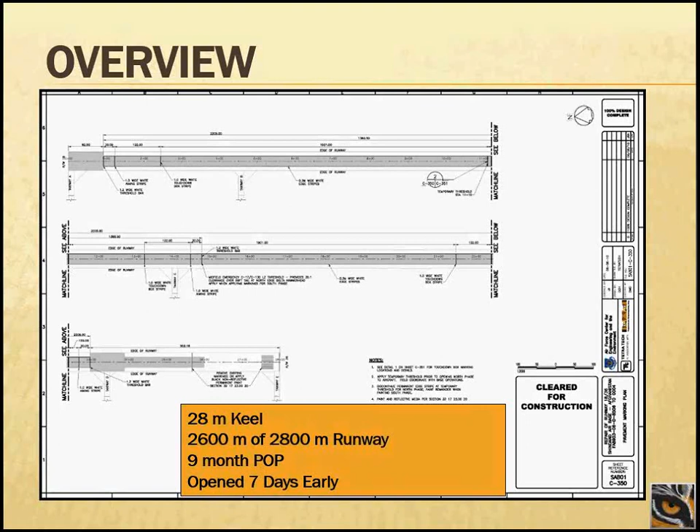Now, not everybody knows where Shindand is, so which is the pointer? The red line. Yeah, that was the switch. You have to do the switch. Let's just use the button. See, I can do asphalt and soils and concrete. All right. Yeah, okay, that was just turn on. There's a button there. Okay, now you got me, okay. You take me back one or two. There you go, did you find the button? No, it's not there. Right here. Oh, right there. Okay, nice, it doesn't show up on the screen.

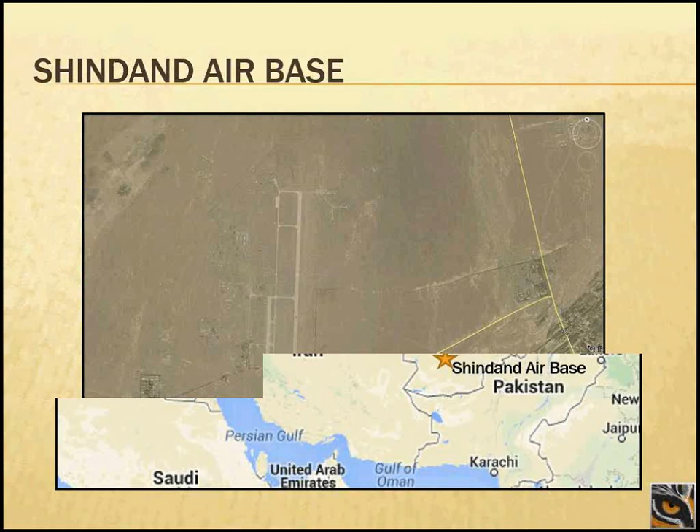This is the air base as it was when I went in there in 2010. A single runway, parallel taxiway, connectors, and the base camp for the Soviets when they were there is over on this side. The village of Shindand is down here. It was sort of a vacation spot for the Taliban, so we were always on alert.

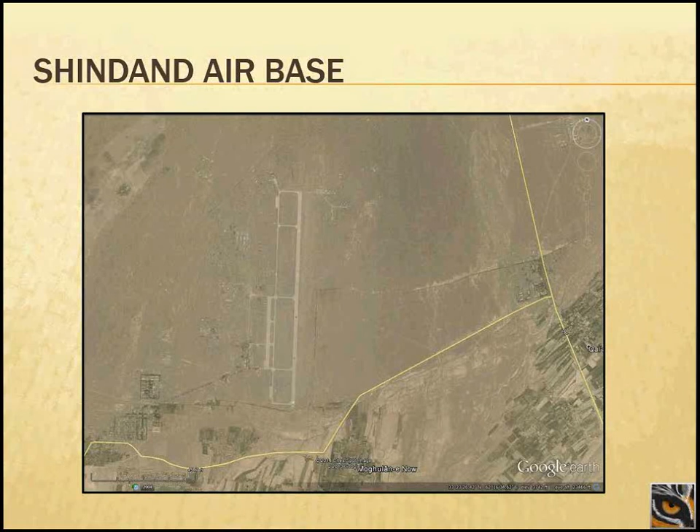When I got there, you don't just buy a United Airlines ticket and go to Shindand. My travels took me eventually to Kabul, where I was picked up, and I stayed in the safe house for about 30 hours until they could arrange other transportation for me. When you're in a safe house, you get to know the people very well because everybody watches everybody's back. A few weeks ago, you may have read in the paper where a common restaurant that Westerners go to is attacked. Yes, that happens.

My marketing person putting this together, he said, but you don't have any pictures of outside. I said, that's right, if I gave the location, there wouldn't be a safe house anymore. So you learn to stay with people. We had special forces in there that were our security in-house, as well as protection outside.

From Kabul, from the safe house, we went to Bagram. I got a C-130 Milair flight to Herat. Spent time in Herat and went down to Shindand.

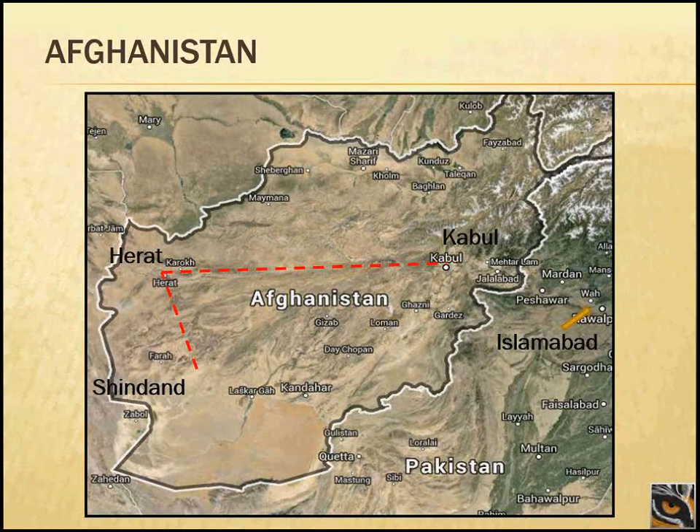Now in Herat, when we landed, we said, where's our next C-130 flight to Shindand? And they said, up there. So we asked, where do we get to stay? And they said, you get the last few bunks in the Spanish Army camp tent. Great. So we spent the night there.

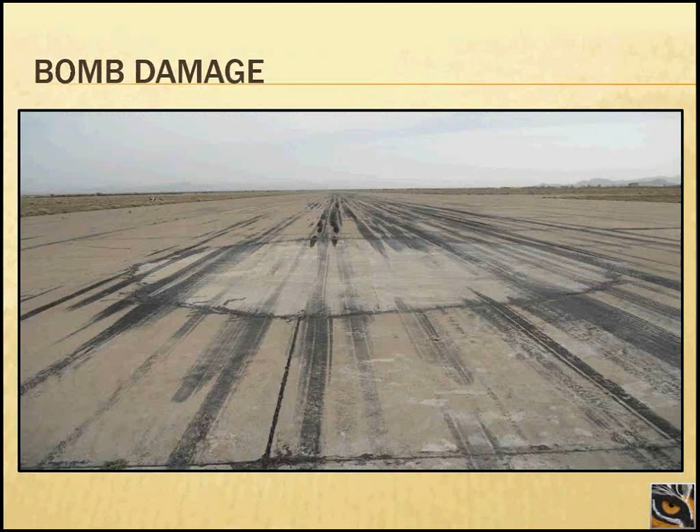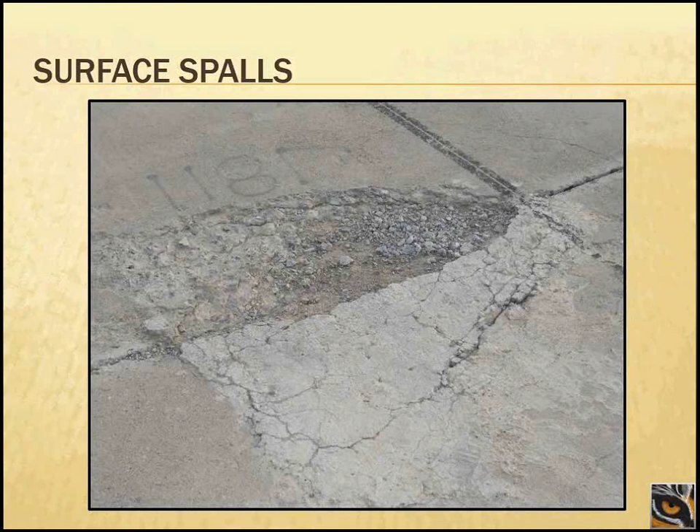The way the Soviets built it, they set up wood forms, left the wood in place, and just built it into the concrete. Those little chips you can see are from the wood forms. It seems so minor because we don't really have a class on FOD.

But FOD will close the runway down. The story I use is that a squad of F-16s left Langley Air Force Base, took off two by two, and in the second batch of two, one of them ingested a thumbnail-sized chip of concrete. By the time they got to Panama City, the affected engine had vibrated enough that the aircraft self-destructed in air, crashed into a civilian neighborhood, and lost the pilot and the plane. That's what that damage was.

So FOD is very, very serious. When I was at another installation right after 9/11 and the alert siren went off, the F-15s on alert came out. The lead one FODed it out because we were there trying to get the taxiway under control to fix it. They FODed it out, that alert mission got canceled, and they had to call it up from another base. So FOD is a very important issue.

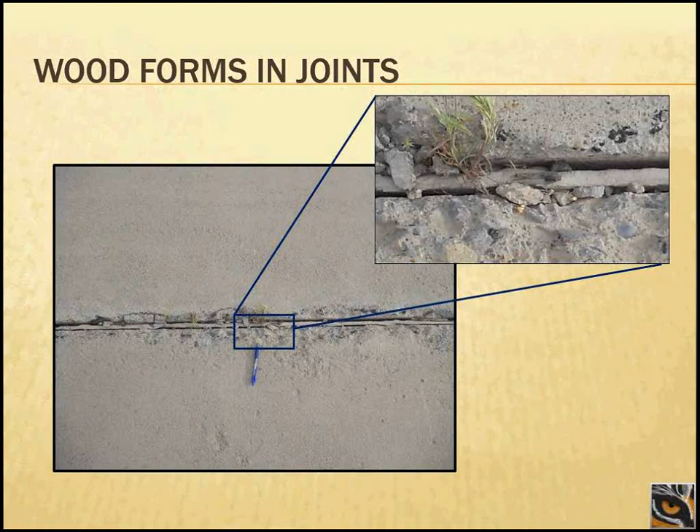That's where the materials come into play. That's what we get here - materials, understanding of materials. And of course, vegetation in the joints.

Okay, you're the pavement expert, you have pavement classes - the very first question you're going to receive is, where do you want your test pits? You have to make that decision.

Well, you took Professor Thompson's class, you know - if you go to the county soils report, you look at your soil series and you divvy them up based on soil series. Well, USDA hadn't gotten to Afghanistan, nor did we have a USGS topo map either. And if I would have done it based upon military guidance, that would have been 46 test pits down the center of a runway, and they said, yeah, well, you're not going to have that - so what's your next choice?

Well, you learn to look around you. We were in a valley - a historic valley where water used to flow through, so it was alluvial deposits of historic sands and gravel. It's variable, but I shouldn't expect near-surface bedrock or anything. So I just wanted to see how much variability I really had, and whether it was going to be a bother to me.

The other thing is I always like to put my test pits where the aircraft and the main gear are. Ones out on the shoulder don't really help a whole lot. So I located them, and I just had to give it a random spacing, alternating on the center line.

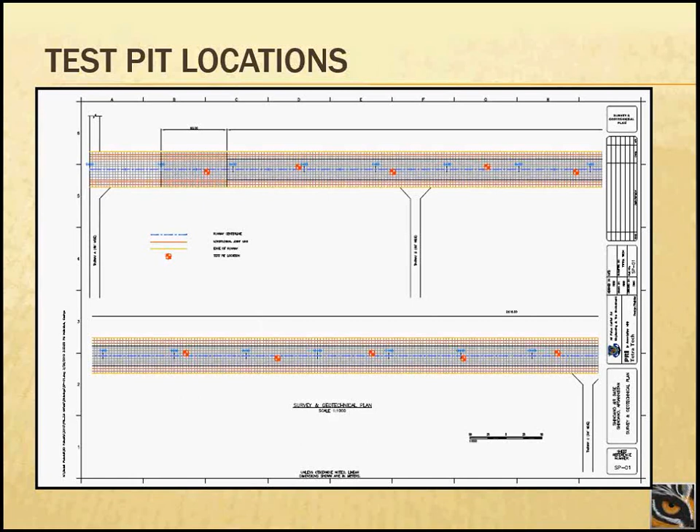Within 1 hour of arriving at Shindand, they gave me 1 hour to stow my gear. They shut the runway down, and they said the crew was waiting for it.

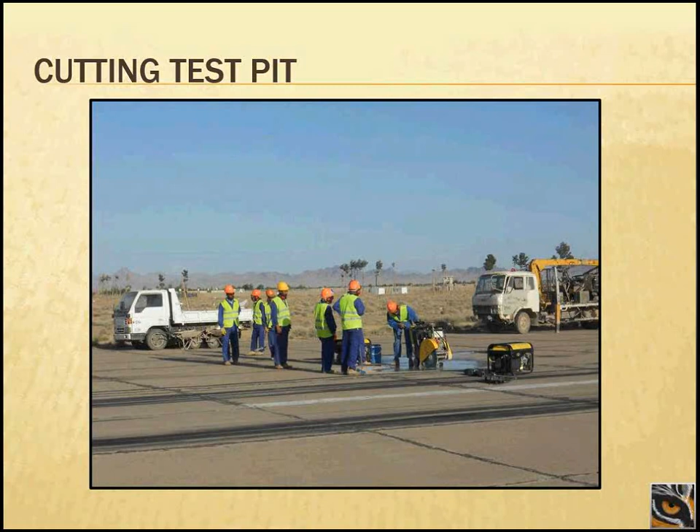We dug it out. Subgrade for the most part was 4% wet of optimum. The other lesson: pavements always are wetter underneath. Even in a desert condition with 9 inches of rain a year, it will always get wet over time. This stuff, when it came out, it was just molded up like clay.

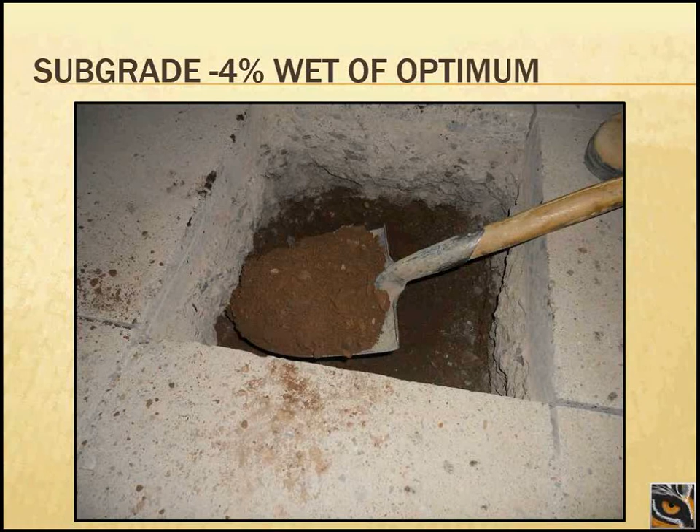So that was one factor to deal with. We were also operating, and they only closed the section of the runway we were working on, so we had the 130s coming in above us, bringing in supplies.

The white truck on the side was the one they gave me to drive. The reason I know and remember that was mine is because it's on the center line. When you take control of the runway, you park your vehicle on the center line, because I want those pilots to know that there's somebody out there. It's very important.

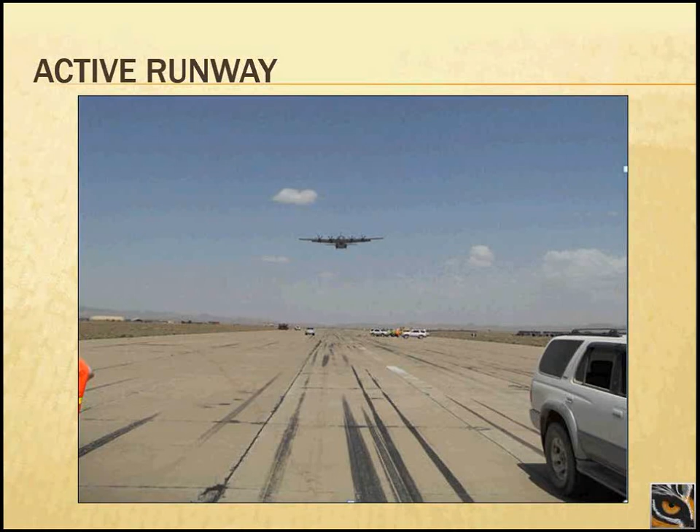Testing. We did do about 18 test pits on the runway, just 1 foot by 1 footers, because we had to then close them back up when we were done, open up the airfield for operations again, every night, for every day. They did have the lab from Herat, which had a field CBR device.

Yes, we had to fix it. Yes, we had to test it all through the camp to make sure it worked. But we got it up and got it running, so that cut down on my lab time.

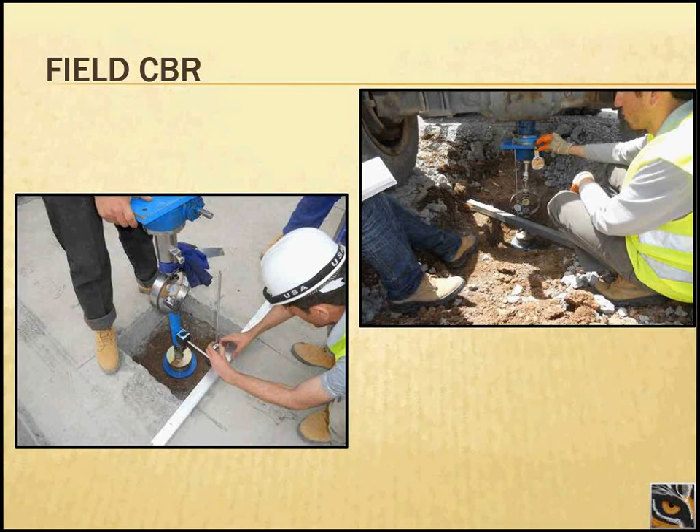We also used the infamous DCP. That's right, I asked for it, and they said, yeah, we don't know what to do with it. I do. It only takes 1,000 blows to drive DCP through the 11 inches of asphalt on Windsor Road, even if you do it 4 times. But it works. Quick and good, solid information.

In an expeditionary situation, you can use the DCP as design data. I did want to see if I had any concerns down deep.

So I dug 1.5 meter test pits off the edge of the runway with the excavator. And we could only go down about that depth because we get refusal. The gravel just got larger and larger. What did I prove? I proved that I had clay, sands, and gravels above that layer.

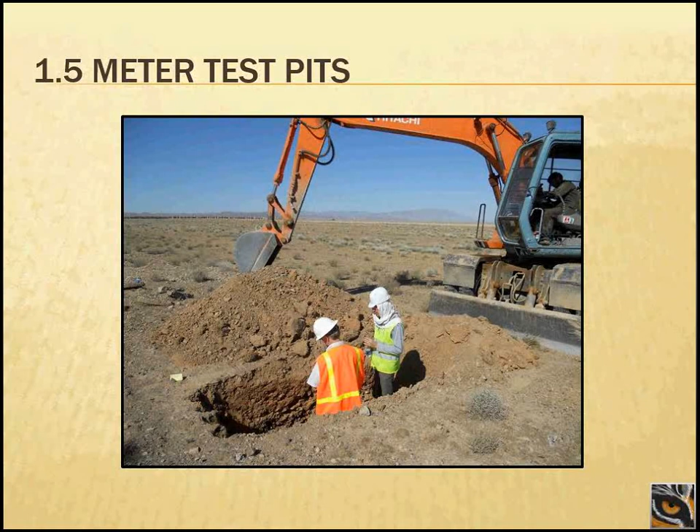And at depth, I hit hard, large gravel that wouldn't excavate. Didn't have any pockets of peat or muck. Didn't have any bedrock to deal with. So I characterized what I was working with. Quick and easy. And a test pit always allows you to see what's there.

Once we did get into the demolition phase, I went ahead and I dug a few out on the runway to make sure there were no more changes.

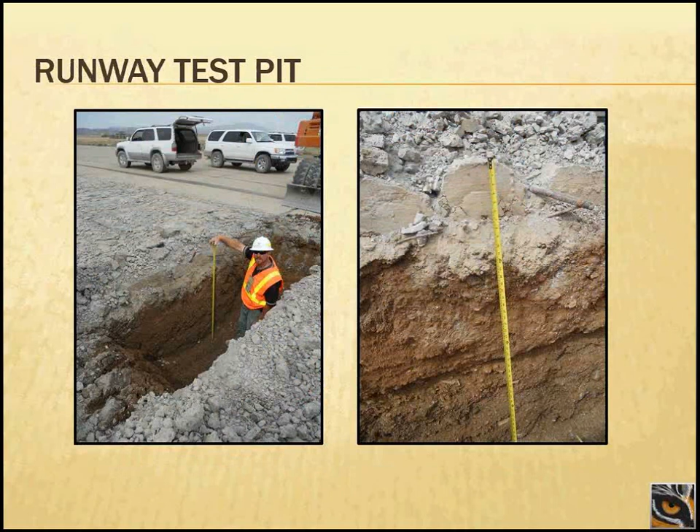And again, you try to explain to them, you do like we do here. You make it in a 6-inch mold, you do in the Proctor curve, and you punch it with the CBR piston. That concept is so hard to get across to routine labs. And it gives you quick information, and it works.

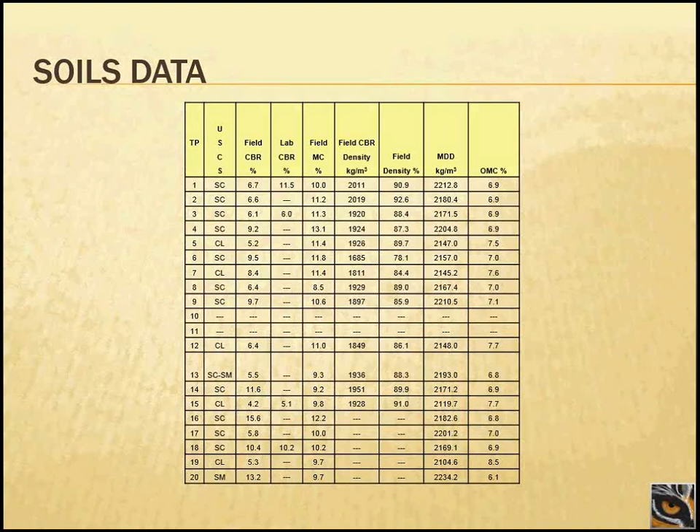Military airfields, different than the FAA. I don't know if anybody here has done a military airfield design.

We do light load, medium load, modified heavy, and heavy loads. Each load has a different mixture of traffic. For a medium load, which is what a supply or logistics base would have, it's B-52s, C-17s, and F-15s, with the C-17 being the primary cargo supply aircraft. The F-15 is for fighters that may come in for refueling or to protect the base, and the B-52 is because every once in a while you may get one.

Now, how do they come up with that many passes? Easy, that's how many passes it takes for one standard war. One standard war is you have so many targets, take so many missions with ordnance for fighters or bombers. There's a number of aircraft, you need so many people and so much support logistics - that's where the medium loads come into. It used to be that for every war fighter with a rifle, there were 8 people in the background supporting them. Technology has lowered that number to maybe about 6.

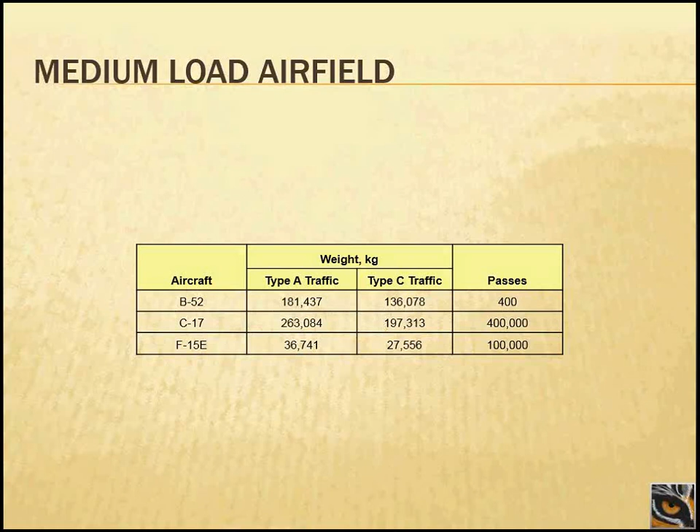So the final section I came up with at the ends, the 300-meter ends, where the aircraft are stopped and either turning around or at low speeds, we make it thicker, 380. The interior portion of the runway is 300 millimeters concrete, and I brought in a granular base on top of the subgrade.

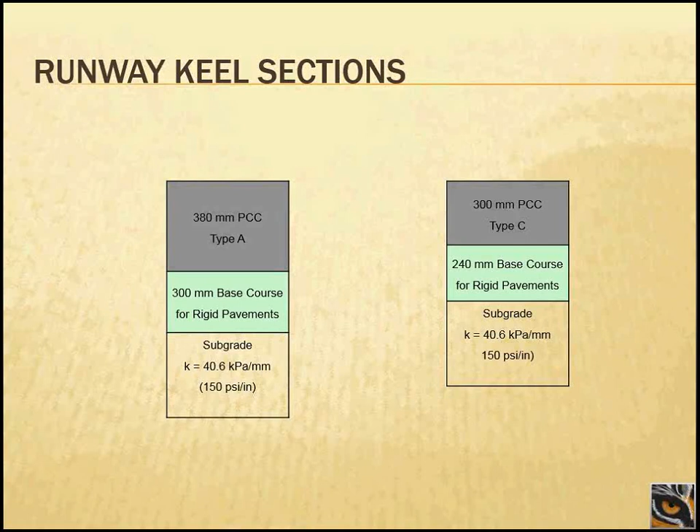So now I've been there for 12 days, I've done all that work. When you're over in a war zone, you work at least a 10-hour day, and you work every day of the week - you never stop. Because if you stop, there's nothing to do, and you'll start to get bored or go crazy. So you just keep yourself working, you drop into a work mode, everybody's working.

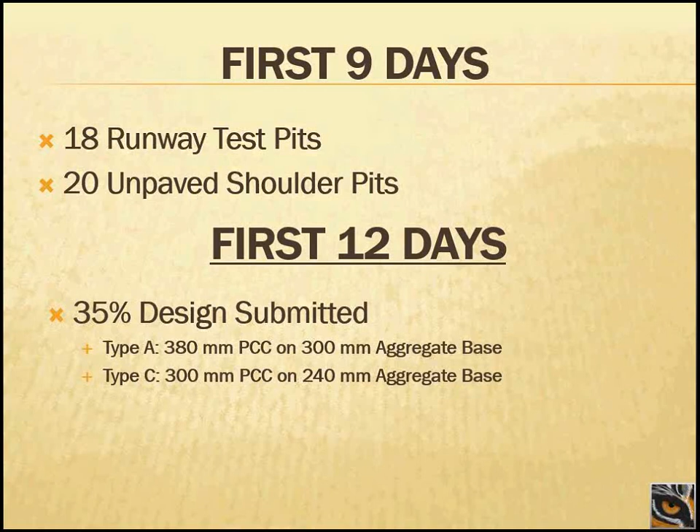So we're ready for work. I strongly expect that the gentleman on the far right was probably there in 1961 as a boy building that runway the first time. I also suspect these gentlemen were out helping with all the runway patching as well, after every event. A few weeks before we got there, there didn't used to be a perimeter fence, so they would come out onto the runway and have motorcycle races on it.

But in the village, they don't have any power. They live in adobe homes that they built. They plant the hay and wheat by hand, harvest it with sickles, and have shepherds to take care of the goats and sheep.

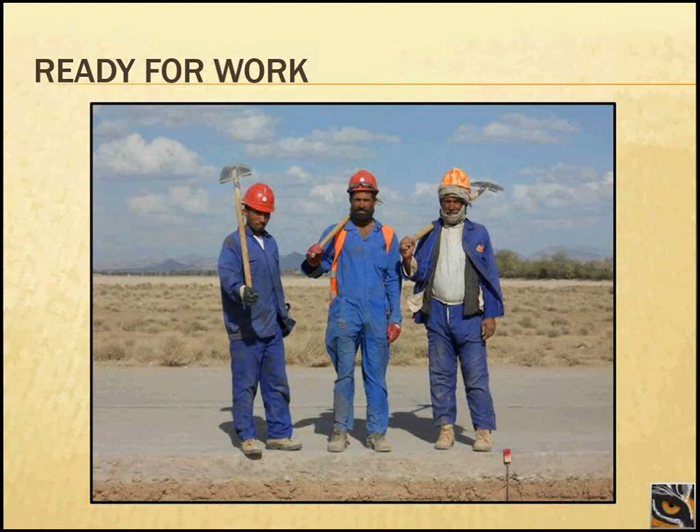So we had to get the keel section operational, which, by the way, I had told the Air Force - the outer edges of the keel were in very bad shape, which is where the outboard engines of C-17s are. Our mission was to get this runway from C-130s to C-17s so the base could expand. Those outboard engines would pick up FOD because a lot of those distresses I showed were out on the outboard side of the keel.

But there were people who didn't quite understand pavement engineering that were assigned to this base, and they argued and didn't want to do that - even though back stateside they were all saying, just listen to John, he'll take care of you, just do what John says. But other politics got into it.

To speed the demolition, this is the rubblization device. You heard Professor Thompson talk about it, I hope. Mr. Thompson and I did airfield rubblization where it was actually transformed into granular base in place, for the first runway up in Selfridge, Michigan in '02 or '03. I've written engineering briefs for the FAA on rubblization, and I've got standard specs set up for for rubblization, so I use it every place I can.

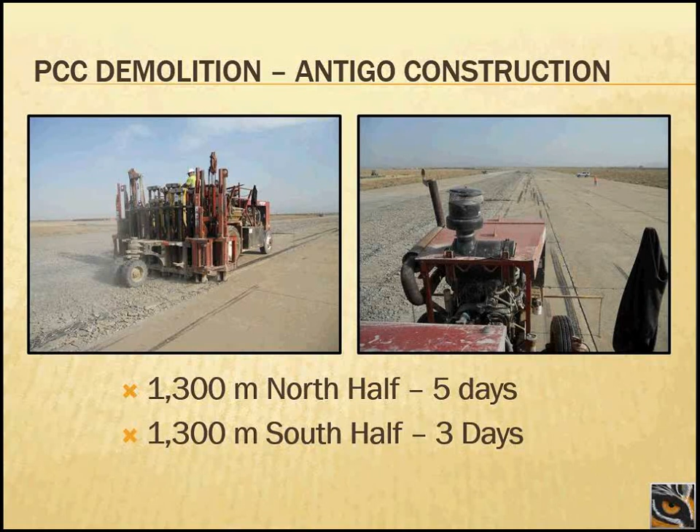There's a mouse, the external one. Yes, mouse connected, you can just keep it. So if you haven't seen one work...

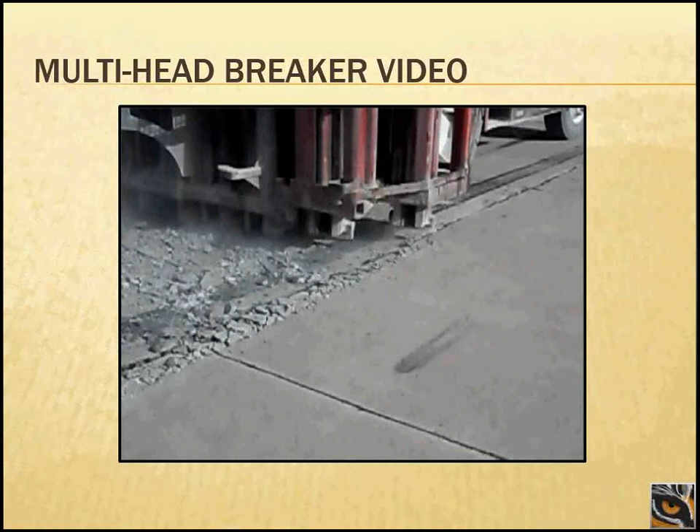doesn't happen. Now the hammer sequencing, is part of the key, and he can control

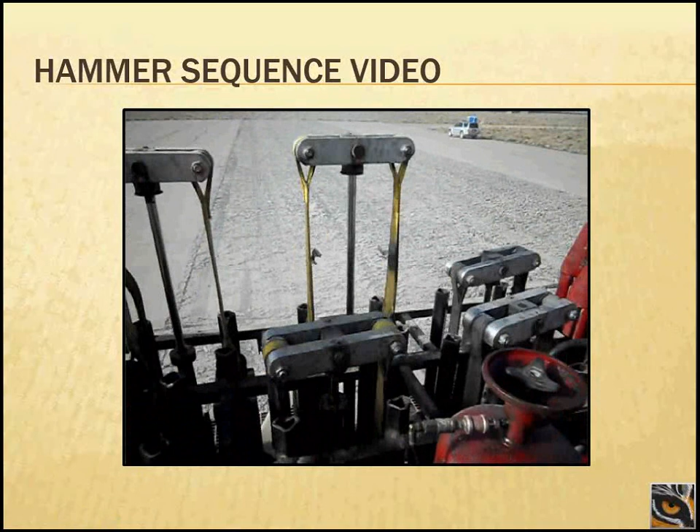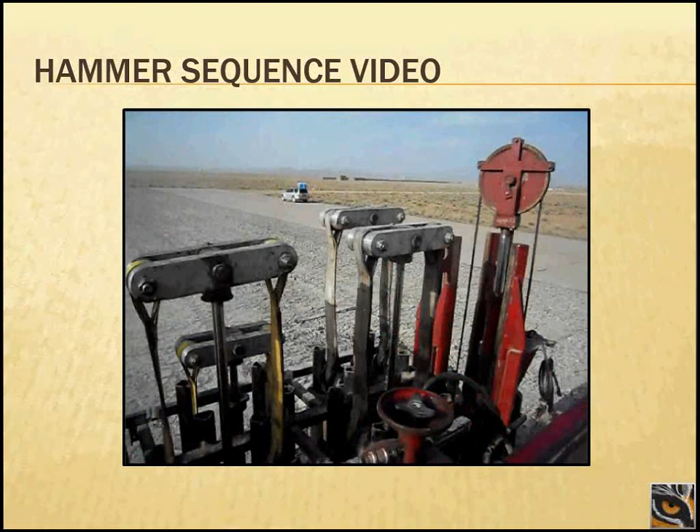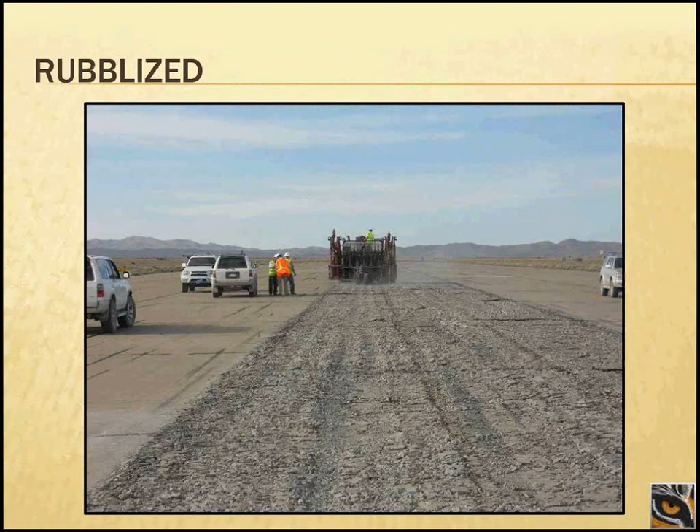You wanted to fracture it to ease the excavation. Just another picture after it's been rubblized. And that's George Shinners himself.

Monday afternoon, I got a phone call on how to remove a 24-inch thick abandoned airfield in Poland, which converts the runway into a truck road. But they had to match grades. I said, well, we can lower the concrete, or we can rubblize it and move it out, or excavate it.

I said, I don't know if Antigo is near Poland right now. They usually keep equipment in Europe. And they said, well, if Antigo is not available, I'm sure we can find somebody else. And I'm like, okay, you'll learn, you'll listen. Sent George an email. He responded yesterday and said he's working at the Krakow airport right now, rubblizing in Poland.

So it all comes together. Wherever you need to be, they can get there. And we are just excavating using a variety of equipment that they could find. Most equipment that goes into Afghanistan never leaves. It ends up eventually being fixed until they can't fix it anymore.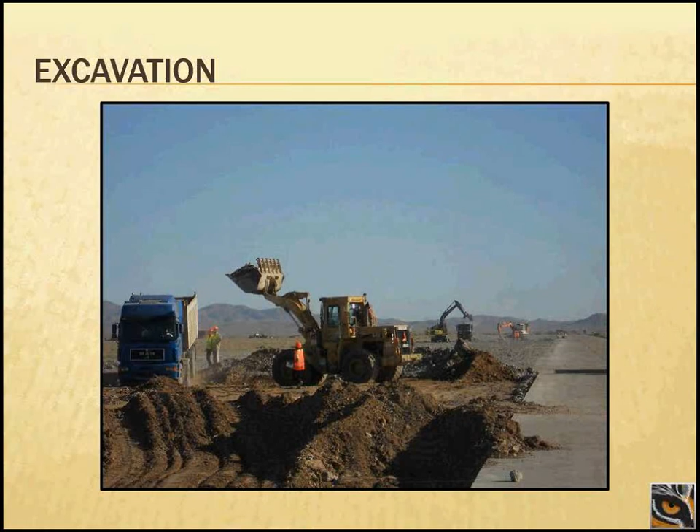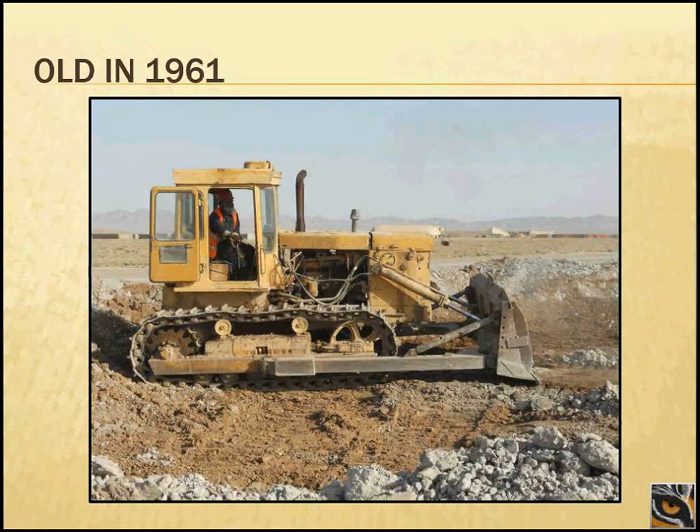I'm certain that when the Soviets were running their bombers out of there, that happened. Also, remember the photograph at the beginning with the surface falls? What do you think this might contribute to?

Tearing out an old pavement is an excellent way to learn why it was failing and what's going on, and what to look for. You really need to pay attention to it. The pavement will tell you what's happened to it. You just have to listen.

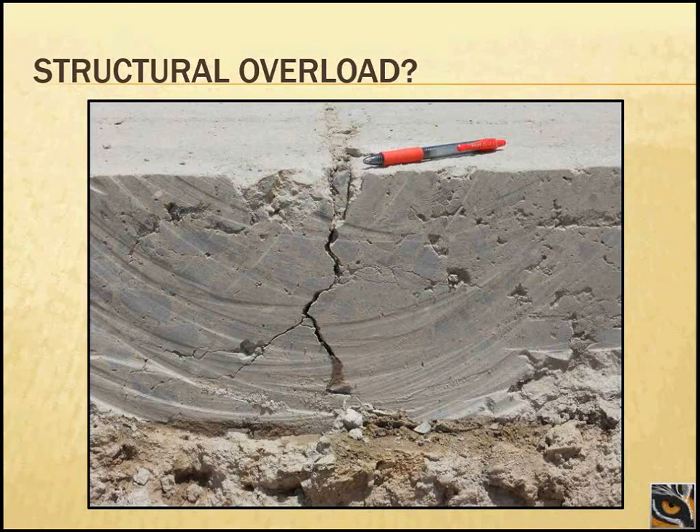So now I've been there for 28 days. Design's heavily underway. Construction is starting. Other aspects we had to deal with.

The Soviets, this was such a crucial base to them that they had well over 10,000 landmines around this base. Stories were that this was the highest concentration of landmines anyplace in the world.

We didn't have time to clear all the mines. We just located them and put a rock on it and painted it white or blue.

We didn't go on little excursions off the runway. And you also hoped that there wasn't a temperature change that it might go off by itself, because once they're so close together, once one goes off, it can just start triggering. I often felt that you could just take a handful of marbles and throw it and hit something.

Now, the Army did clear us a path through the minefield to go from the runway back to our camp, as well as a haul road, so we had that. But did not go off the edge of the runway.

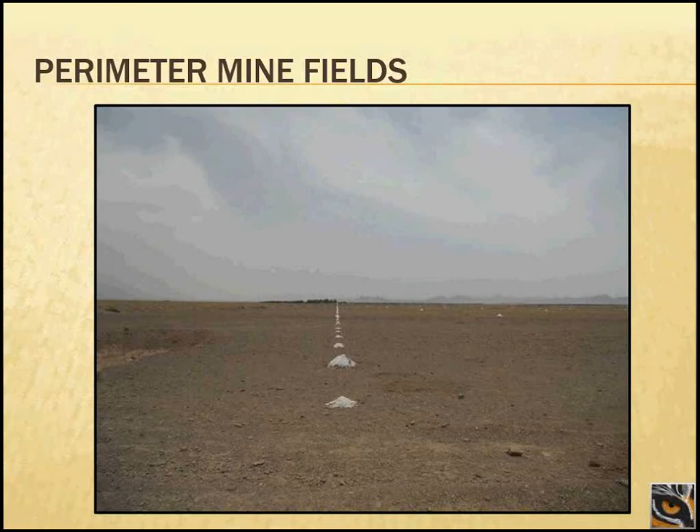Hey, it works. It works.

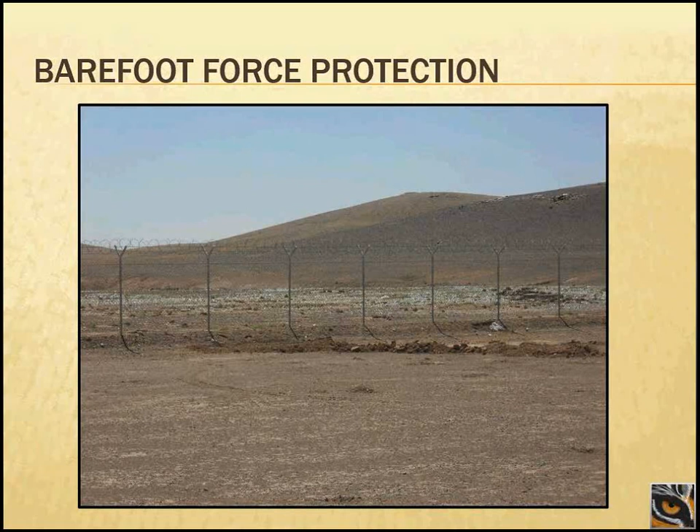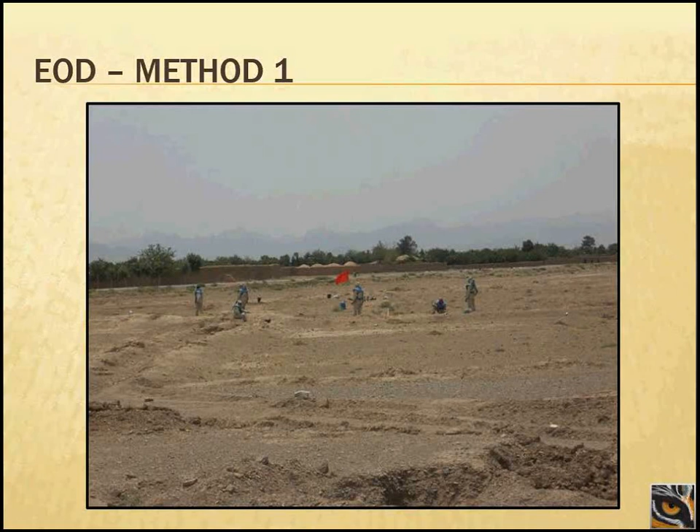This is the EOD crew in the process of clearing and locating. These were actually Afghan Army soldiers doing it under U.S. direction for training. Behind them you can see the wall around the village, and this road is the road you'd take to Herat if you went that way.

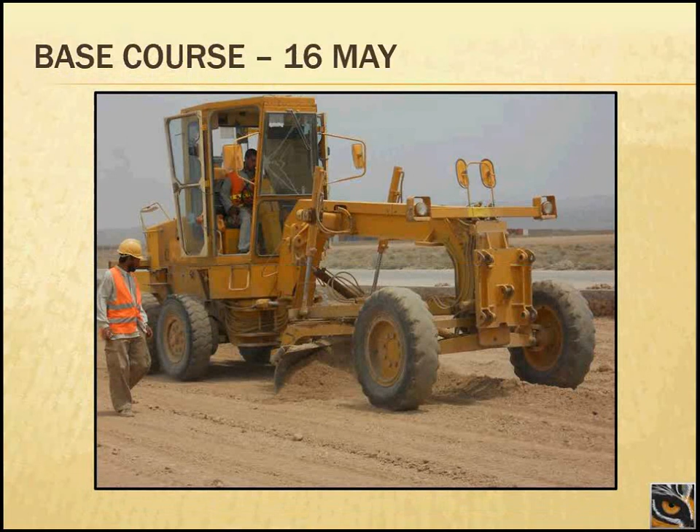Placing base course, we've all seen motor graders at work. It's crucial to watch how everything is working coming off that mold board, because that's where segregation happens. In our modeling we assume we have a nice uniform, homogeneous, elastic material. If we segregate it during construction, we don't know what we have. So it's important to watch how it's mixing or coming off the mold board and shaping it. If it gets too dry it's going to segregate, and we have something different. So you learn to be near the equipment, but not too close.

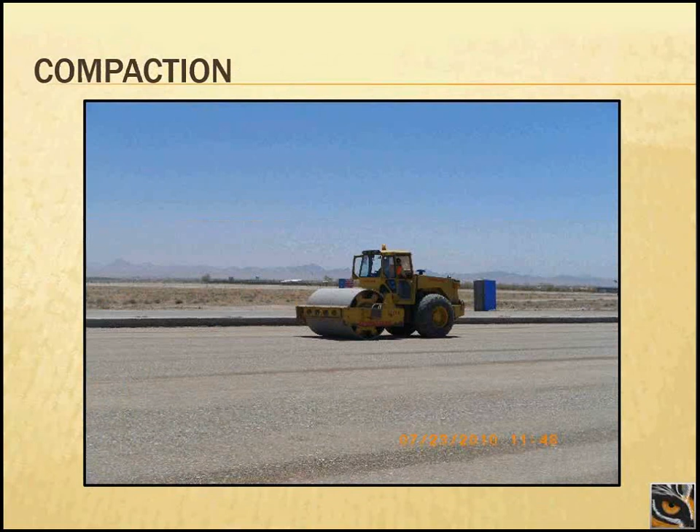Watch the material, watch the material. Conventional roller, doing the base course, compaction.

Sand cones. We couldn't get nuclear gauges in the country, obviously, the word nuclear was on the ticket so we couldn't bring it in. We had sand cones instead. The wind was always blowing, day and night, so we had to put up little wind blocks so that when they're putting the sand out it doesn't blow everywhere. We had two sets of equipment, so we could do it twice at a time and maybe get a good answer that looks reasonable.

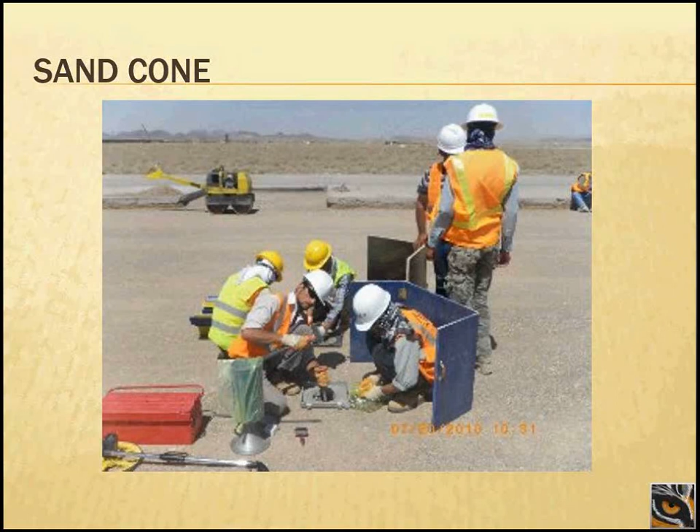So, 39 days on site. Everything is moving along, waiting for the batch plant.

Other than, once we start doing that, the next day he'll come up to the fence again, and the next day after that. By the 4th or 5th or 6th day, an IED will be planted. They watch them and target them. They do not care who they kill, they can get a U.S. person or coalition forces, they will take them out.

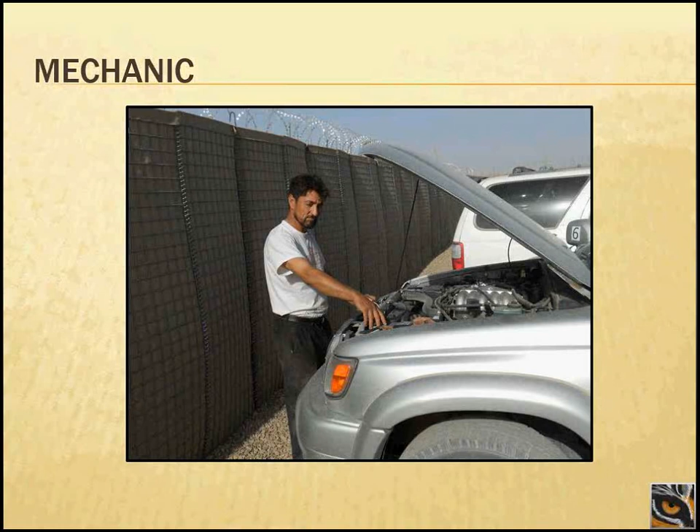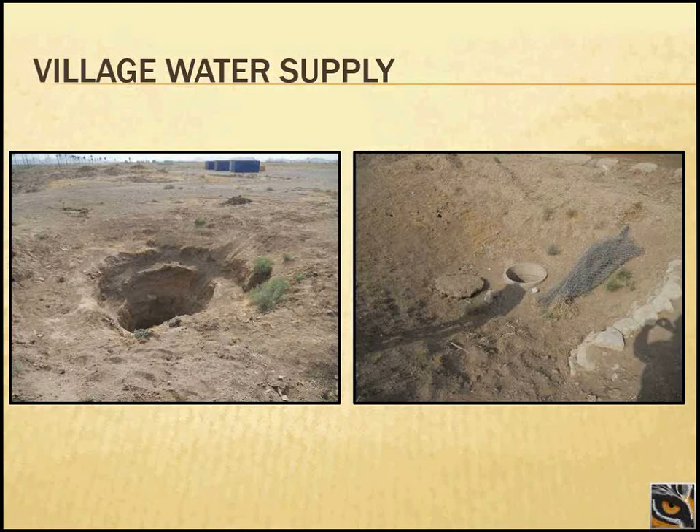But there it is, the water's still flowing. Now, the tempo of attacks on us increased when we brought in the well drilling equipment to drill the water well for the batch plant. This one is only 25 feet deep, and yes, it's good for the village, but we needed much higher flow rates to feed the concrete batch plant as well as for the future use of the base.

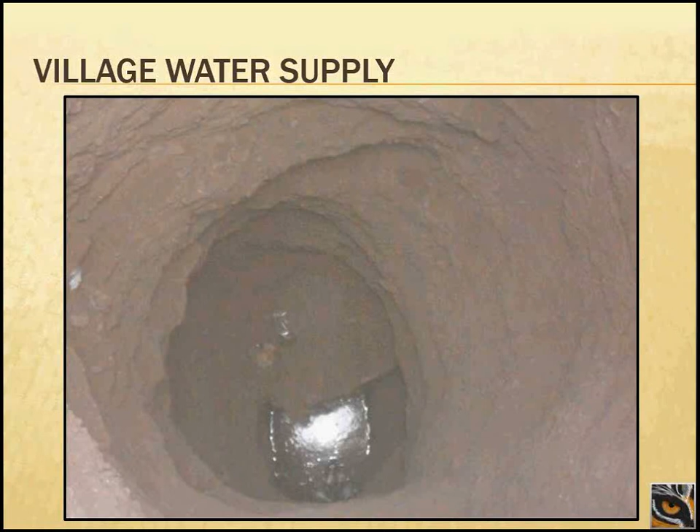But the villagers were afraid we were taking it, so we brought the village chief out. He looked and saw that the well was going 2,000 feet deep, well below their water source, so we were okay.

Back to some technical. Concrete mix.

ASR is a concern for the U.S. military overseas, so they want it mitigated. We don't have fly ash — it's very hard to come by in the Middle East. Even Germany is the nearest source. So a lot of times silica fume is used, since it's very available. But if you have silica fume in the concrete, the workability disappears. It's very harsh to work, so we use superplasticizers, high-range water reducers. We don't use high-range water reducers in the U.S. for airfield paving concrete — don't do that, because it'll shrink up and crack, and within a month to a year you'll be replacing it. So over there, we had to come up with a mix design that would work for the materials we had.

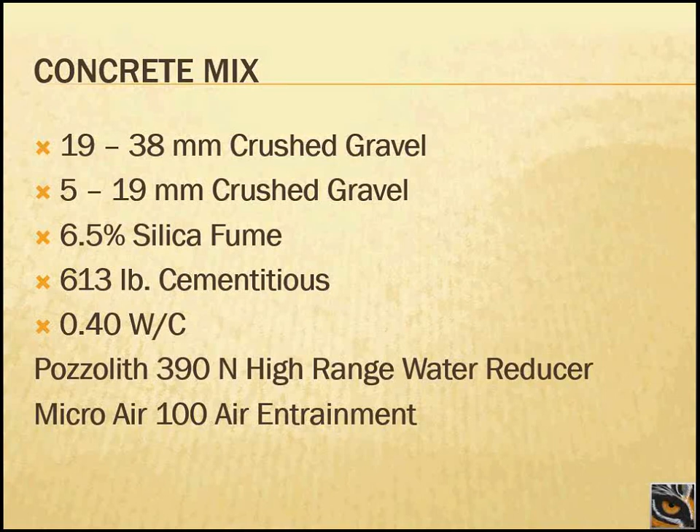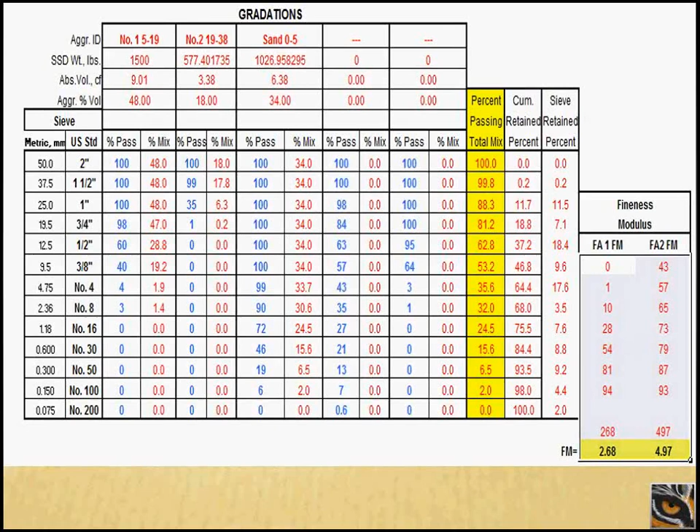I look at the gradations, because part of the research and work I've been doing for the military over the last 10, 15 years has been optimizing concrete mixes so they don't chip and spall at the joints, because that's where our first failures come from.

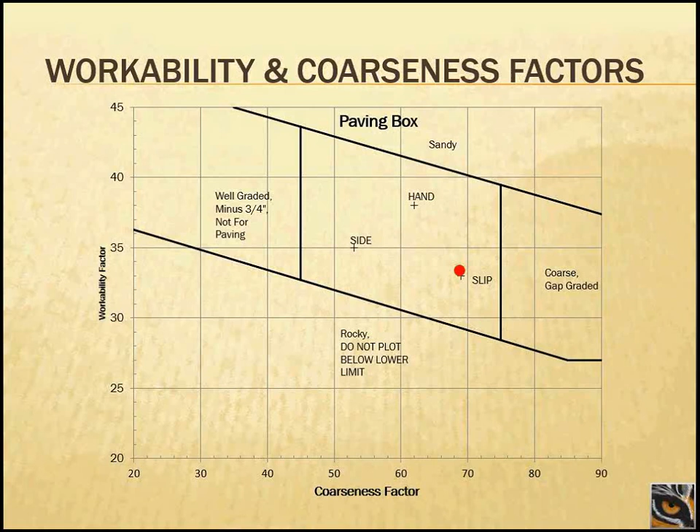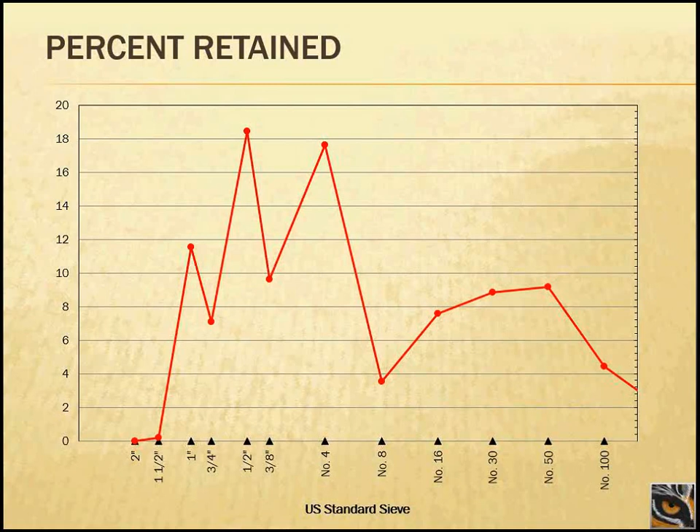You may have seen some of this information, but one thing we call this big box. We know if our combined gradation is within the big box, it can work; if it's outside the big box, it will not work. I've taken it further and looked at the percent retained chart, looking for no big peaks or valleys. This wasn't the best, but then I looked at the third chart I really believe in now — the 0.45 power curve. Hey, does this look like an asphalt mix design?

Yes. And the specification I'm now under contract to write — the green line is the max density line, this is the 0.45 power curve. If we set an upper limit and a lower limit for one size — say this was a 1.5 inch rock — we set the upper limit with one size smaller, and the lower limit with one size larger. If we keep our combined gradation within those two extremes, we won't have any spalling, especially down in this range, very similar to a sand hump in an asphalt mix in the pre-Superpave days.

This range down here, I found the hard way: if that hump exceeds the upper limit, you will get spalling before the crack even begins to appear. You'll get sliver spalling — very small slivers, but just enough to damage an engine.

So this is the new guidance that we're preparing. Ray Rollins and I are doing that, and Shiraz is going to participate.

I also used this criteria to convince the Navy — this is what we use for the high temperature concrete using lightweight aggregates as well. And that guy is...

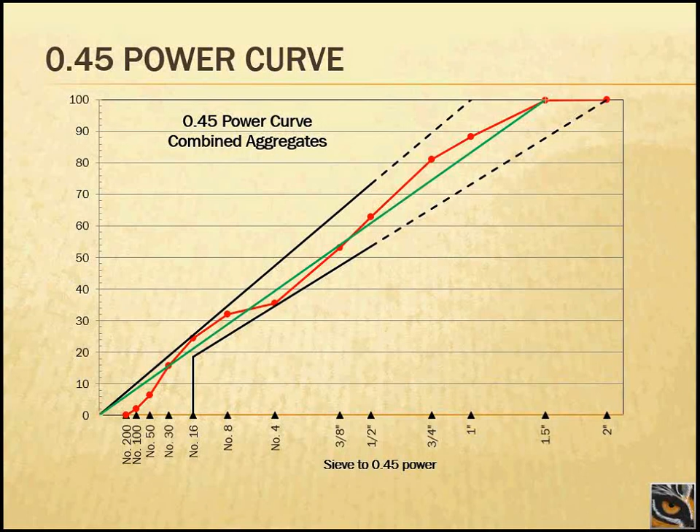Batch plant, two mixers, horizontal shafts, continuous mix. Most of the concrete plants we use here in the States are central mix — a single, maybe 10, 12 cubic meter drum. Not an option over there. These are Turkish-made plants, so we have two horizontal shafts. I thought I had a photograph of it. I only had 30 minutes to inspect the plant. Which, by the way — did you know that as a pavement expert, you also have to know everything there is to know about a concrete batch plant?

Mm-hmm. Now, Professor Carpenter taught us everything about how an asphalt plant works. I don't know if you still do that or not. But, you know, all of a sudden you have to be an expert in everything. Okay.

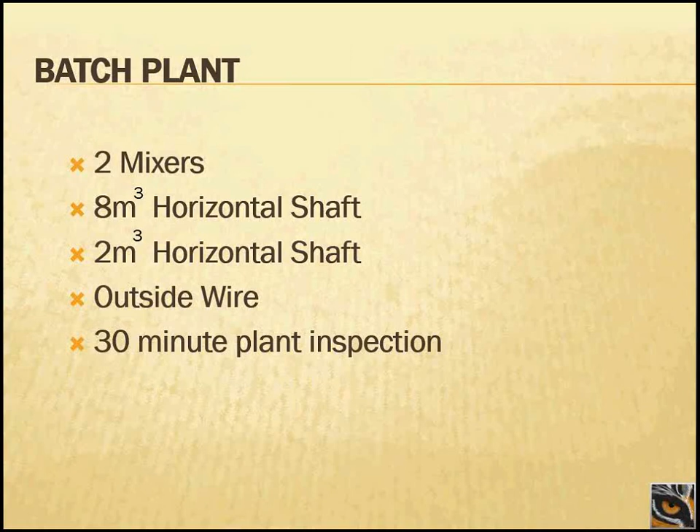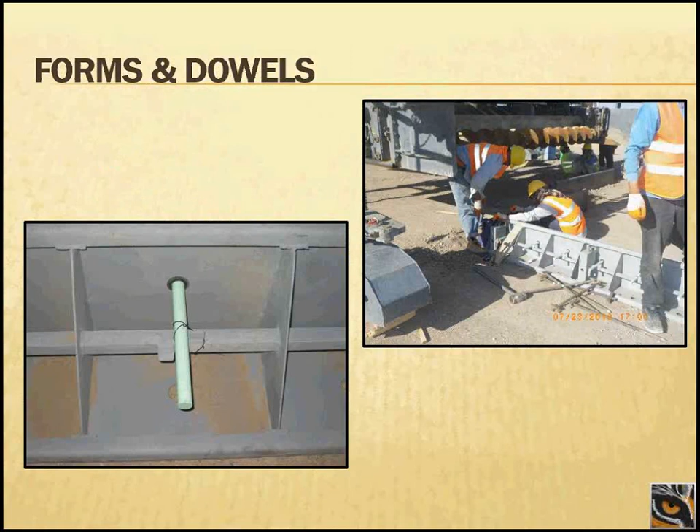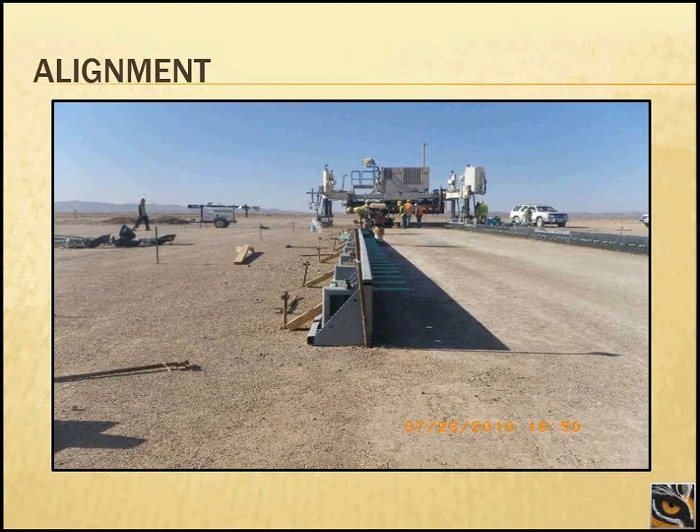But once you start looking for certain things, it'll work — steel forms, setting them, and dowels, traditional airfield design and construction. Make sure the forms are aligned straight, dowels are straight. If it doesn't look straight, it isn't straight. You don't need to measure it, because if you measure it, you're going to find the problem. But if it looks straight, you're okay — concrete can actually handle a little bit of things that you would not measure.

And we did. Every airfield paving contractor is the world's expert, and they will tell you that. You listen to them and how they talk, because you learned at Illinois what to listen for, to see what language they're using. And you say, that's great, let's still go ahead and do a test placement before it's even official, just to see what this concrete mix will do in these conditions, when it's 120 degrees during the day and only 100 at night, and you have a 10-mile-an-hour wind blowing. Let's see what it's going to do.

And I don't cure it either, just to see how long it takes before the cracking starts to occur. Amazing, all of a sudden we start learning. Okay, let's keep learning, because it's easier to rip it out when it's just a small area, a third the size of this room, off in the dirt someplace, than to try to do it on the runway. Let's walk them through and learn it.

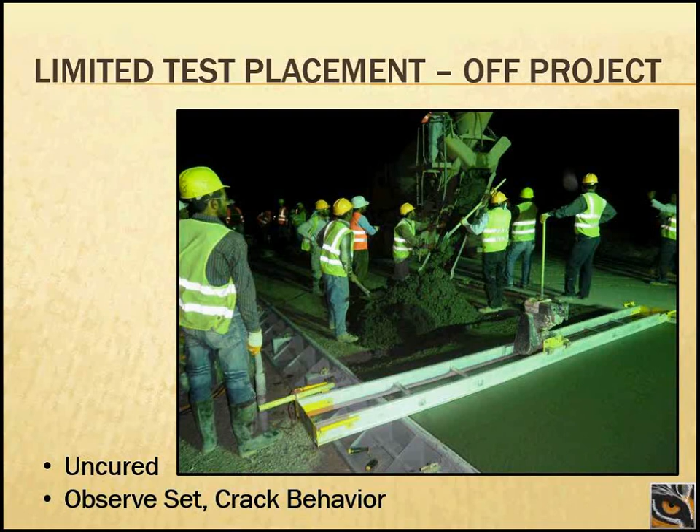And that identified problems with some of the test equipment that wasn't right, and they learned their procedures, and it was a benefit. Now this is where I got really excited, because 20 years ago I had to become an expert in concrete paving machines. And a Wirtgen machine, a Turkish contractor had bought a brand new one for this job. I was excited, because Wirtgen paving equipment is like, okay, this is good. That tells you, A, the contractor is smart, and B, the equipment can do the job. It comes from Germany, it's great equipment.

Now, you build the machine to whichever width you're going to be paving, and it takes about 3 days to assemble a machine to whichever width you want, if everything goes well. Over there, it takes about a week, it's very slow going. You buy the pieces and parts to build the width. So early on, because this was design build, I had worked with the contractor. He said how he wanted the size, he wanted to build a paver to, and I designed the job for that to work.

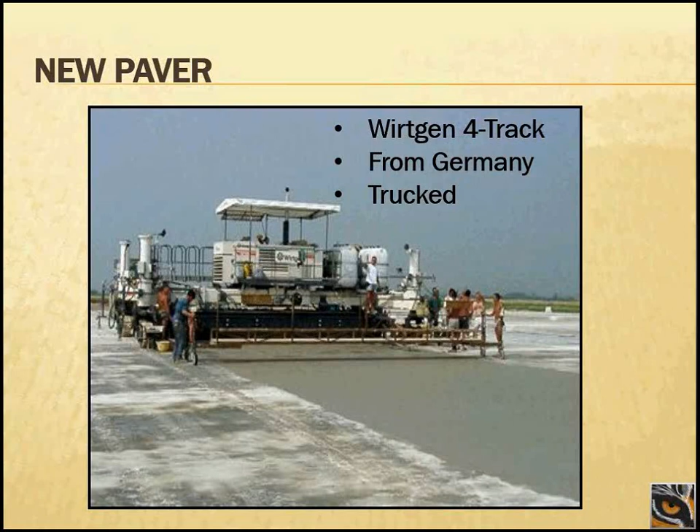We had the paver en route, coming from Germany all the way by truck. It was about 25 clicks from our base. And the only reason we got these pictures is the truck driver was shot, and the backup driver with him wasn't killed, but he was shot, and he got away and hid. He took the pictures with his phone and called for help later. So we're like, oh man, now what do we do for schedule? And that's the paver.

Interesting is that you could have a container box coming with great big generators, and those don't get destroyed like this, because the generator has resale value. So what the Taliban does there is they go up to the truck driver and tell him, you can either get out and walk away, or you can try to fight and we'll kill you, but either way, we're taking the truck. Drivers would leave, they'd take the truck back into a neighboring country, and some contractor working for the U.S. forces said, I need some generators. Guess what, you're in luck today. They would be resold over and over. It's a different market, a different world.

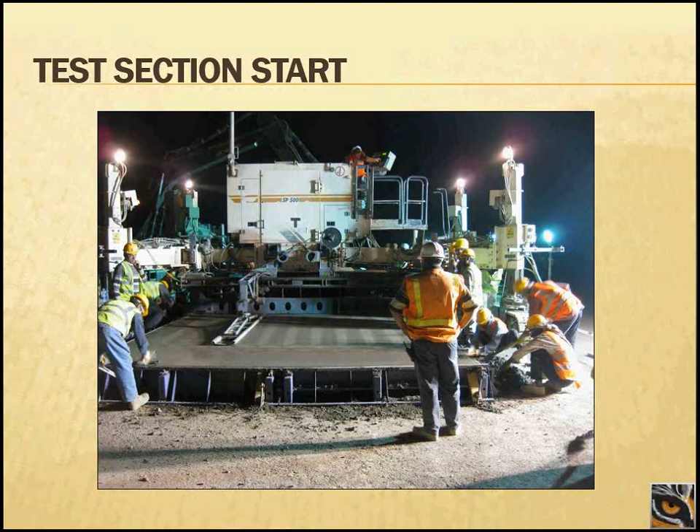So after that happened, to meet the mission needs of this base, the Air Force picked up another paver on a C-17. We loaded it in, and they flew it into Iraq, and we couldn't offload it there yet. An incredibly heavy armored convoy brought it down to us. It was a smaller paver, so I had to redo all the joint layouts and redo the designs again to make it work. Start paving.

When you do airfield work, you will learn to live at night, because most of your airfield paving will be done at night due to the heat. So you get accustomed to that. And that is actually the moon up there in the background. The little speckles are actually dust flowing through that the flash on the camera picked up.

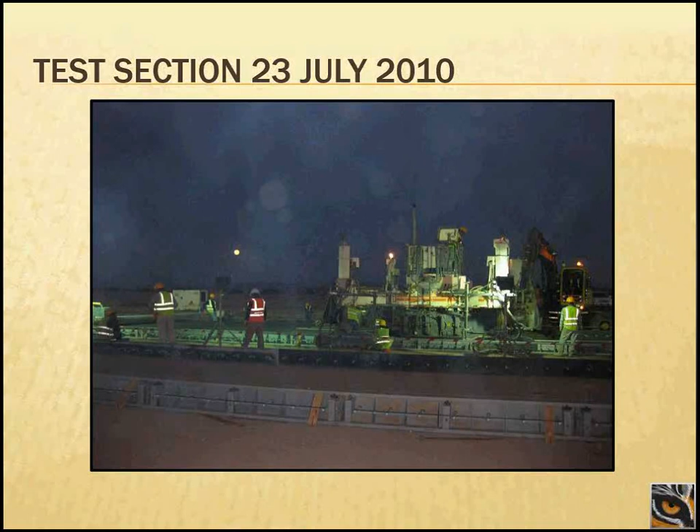And wherever he went, he built his lab on site, he brought his equipment in. We had the Corps come in to certify it, but I had looked at all the equipment anyway, and we couldn't wait for the Corps, so I said, can you just bring it through and look at it? Because remember, I'm a paving expert now, because I've been here, so I had become a lab certification expert.

And he always travels with a parakeet, so out in his lab he has a little parakeet in it. But he knew exactly what he was doing. I was very impressed. You always build that relationship. I left him a flashlight and a Stanley 12 meter measuring tape that I bought from Home Depot. To him, that was like, wow. Little things.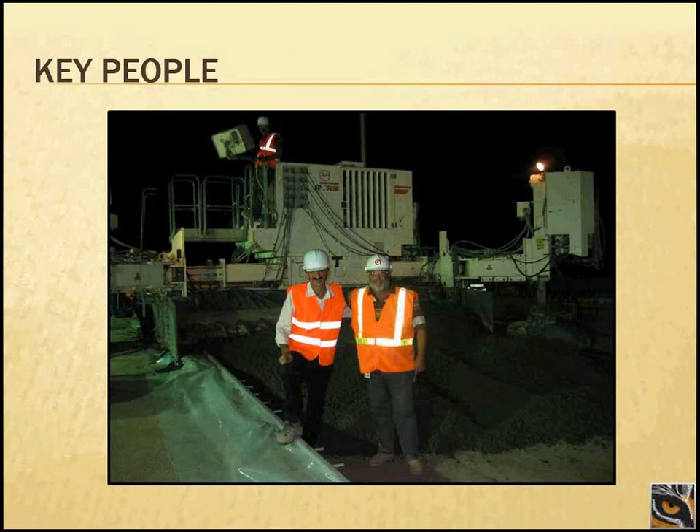Curing, moving along. And finally, our first C-17 arrives. This base now has 2 runways, a variety of mission activities. We're still there, Tiger Brain is still working there, I'm still doing projects there. Even though we are pulling out of Afghanistan, Shindand is still going to remain one of the operational facilities. Activities there, not too technical, different viewpoints, a little bit different than Central Illinois. Any questions?

When I was in Baghdad in 2009 doing the same thing, there the nearest source of aggregates was about 80 kilometers away, way back into the red zone. My introduction there was I went to the batch plant operator, Mr. O'Muir, from 77 Construction, because he and his brother graduated from the U.S. in 1977. I said, I need to know where you're buying your aggregates.